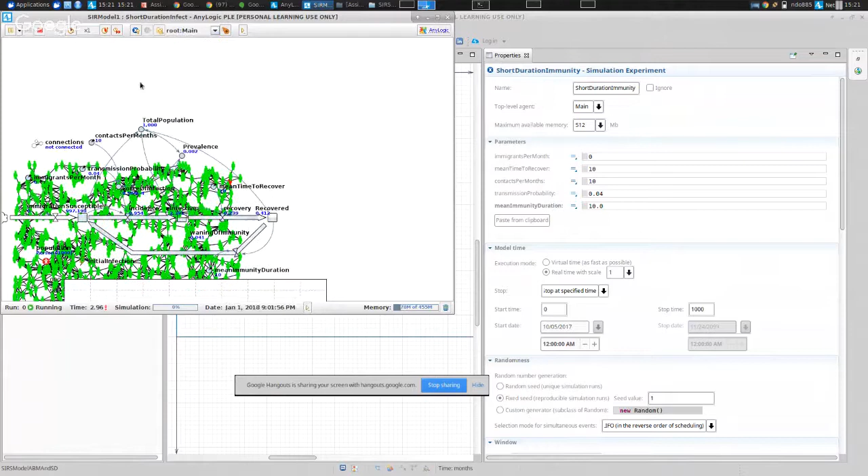So here we go. We are going to run this at full tilt, the infection spreads, etc.

You may remember that what happened here was that in the system dynamics model, we went into an equilibrium where the number of infectives and the number of recovered individuals were both equal proportions. The number of susceptible individuals was this green one here. Infectives and recovereds were both at this value here. And for the ABMs, we exhibited a prevalence which was alternating here in the general area of the number of infectives from the system dynamics, but it oscillated and was a bit lower.

Why was it oscillating like this? Can anyone say? Why would this be oscillating around? Where is there uncertainty in this model over time? Where is there some element of chance over time?

Yes, stochastics - there's uncertainty. The connections between people, although those are static, mediate a sort of transmission over the connections, which picks a random person to connect to whom I'm already connected. So if I'm infective, I send a message to a random connected person around me.

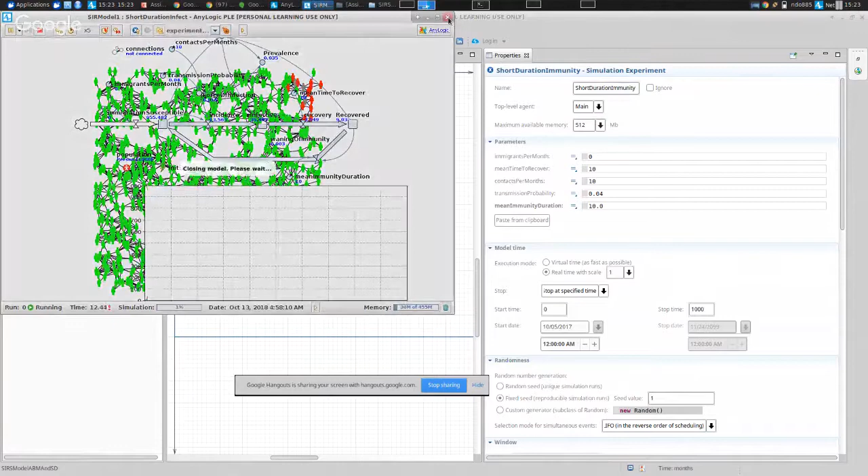I had imposed last time, by fiat, a distance-based network where two given individuals, A and B, are connected if and only if A and B lie within 20.675 units of distance of each other. I noted that each of these small squares, the tiny squares, was 10 units of that. And I noted that in AnyLogic there's a corresponding thing that translates that to meters, which we abstracted away from. So here we're going to have people connected to some number of others.

I'd like to put in first machinery to allow us to see how many people they are connected to. Secondly, machinery that varies that a little bit to see another variant involving their connections. And then, moving on from that, I'd like to examine the impact of choosing different network schemes.

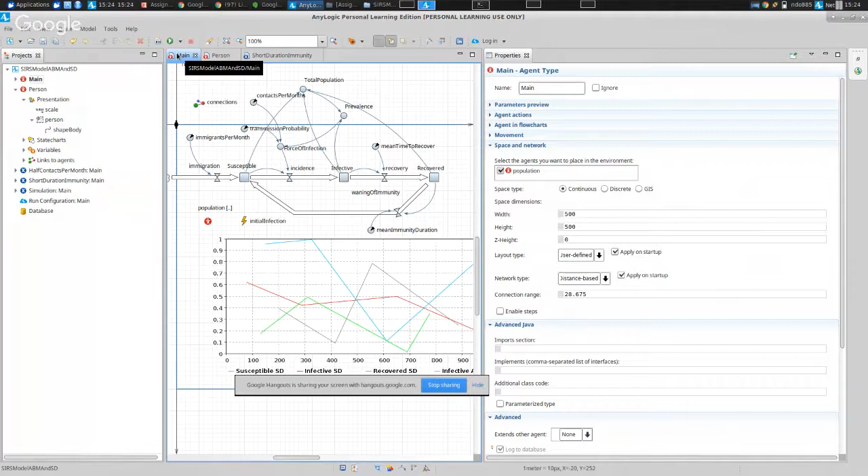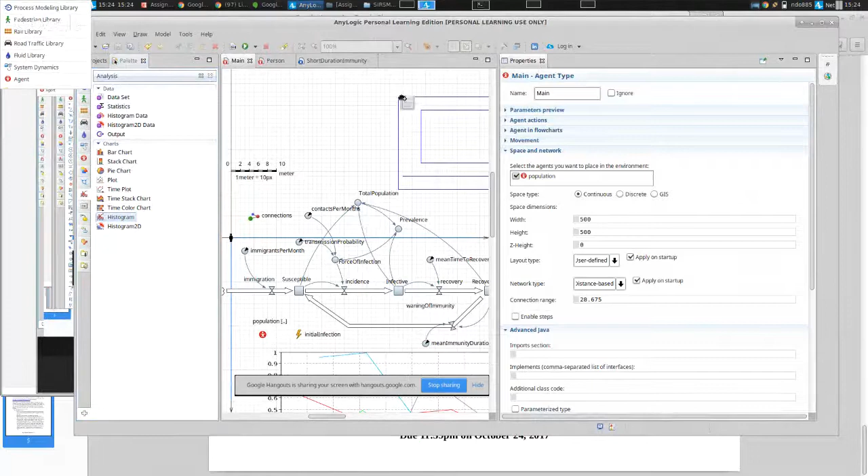Okay, we have miles to go and little time, so I'm going to ask you to follow me carefully. The first thing I'd like you to do is open your palette, go to the Analysis tab, and drag in a histogram. A histogram is shown here.

What does a histogram show? Can anyone tell me? What's a histogram? So the x-axis will be a value, often bins of value, so ranges of values. This bin will represent things between 0 and 2, there's the one between 2 and 4, the next one 4 and 6, say. And then the y-axis is a fraction or count of all the things, how many fell into each bin. So you could think of it as an approximation to a distribution - what fraction of the time does it fall in this bin, 0 to 2?

What fraction of the time does it fall into the range 2 to 4, or the range 4 to 6? A histogram allows you to summarize a distribution in a discrete form. It depicts what fraction of the time values fall in this range, or that range. If we picked 1,000 times, we might see a bell-shaped curve on a histogram. Does that make sense? Have you seen that before?

Hearing no objections, I'm going to go on. This is a histogram. We're going to call this connection count histogram.

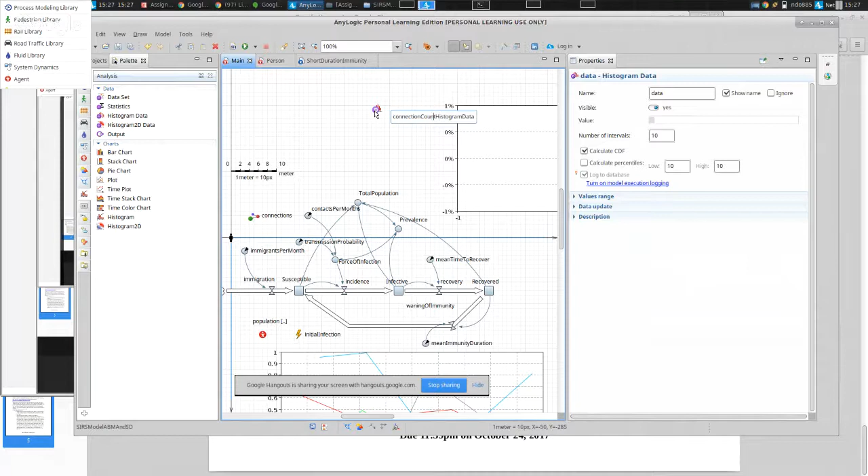But I'm going to do something a little bit more. I'm going to say index connection count, meaning it's going to be for a given person. We're going to create one later that's going to be for that person's friends. Okay, index connection count histogram data.

And then this histogram itself, we just dragged it in, and we could set the number of intervals and so on. We're going to go back to this histogram and say add histogram data, and we're going to say index connection count, meaning the connection count for the person of interest. Later, we're going to have it for their friends. So this is going to be a connection count, and we're going to refer to index connection count histogram data.

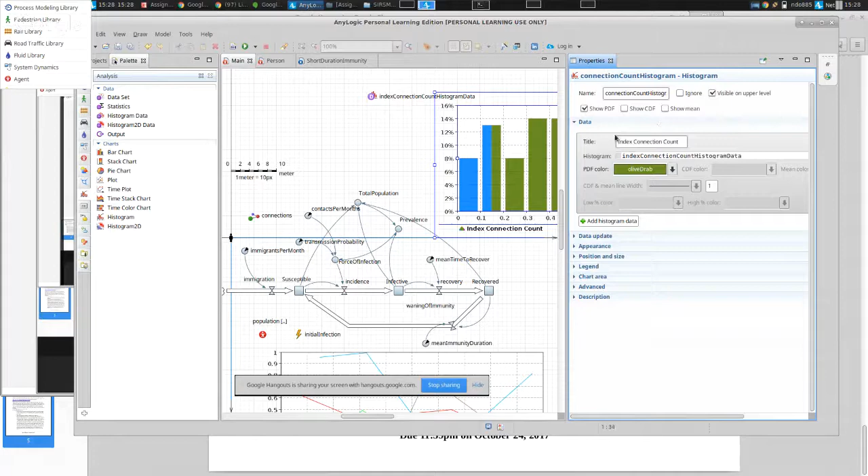That thing we just added in, that's going to be the data that we're getting. Okay? And then in the data update area, you can leave it as do not update data automatically. Are we okay with that?

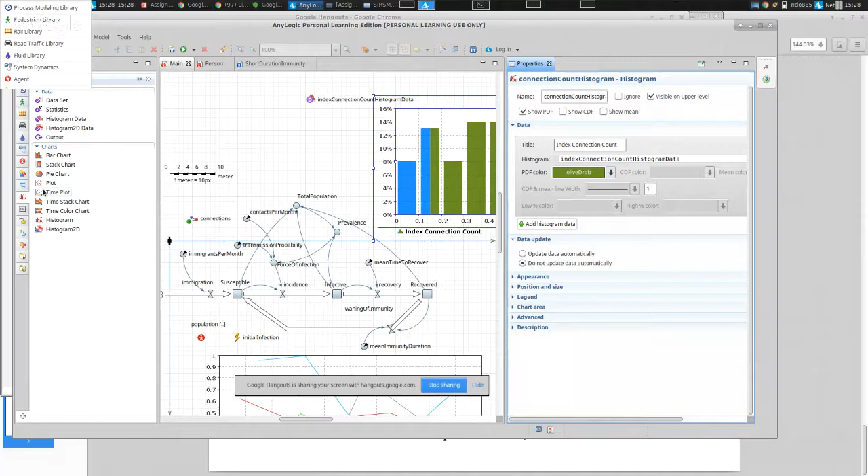What did I do? Ladies and gentlemen, I went to the Analysis tab of the palette. From the Analysis palette, I took in a histogram. I then took in a histogram data. I called each of them respectively connection count histogram for the histogram, and index connection count histogram data for the data item. And I made the histogram refer to that histogram data object.

We're going to later add another one in here too, but this is going to be the first one we're associated with. And I made sure it's do not update. Are we ready? Any questions on what I've done? Hearing no questions, I'm going to proceed.

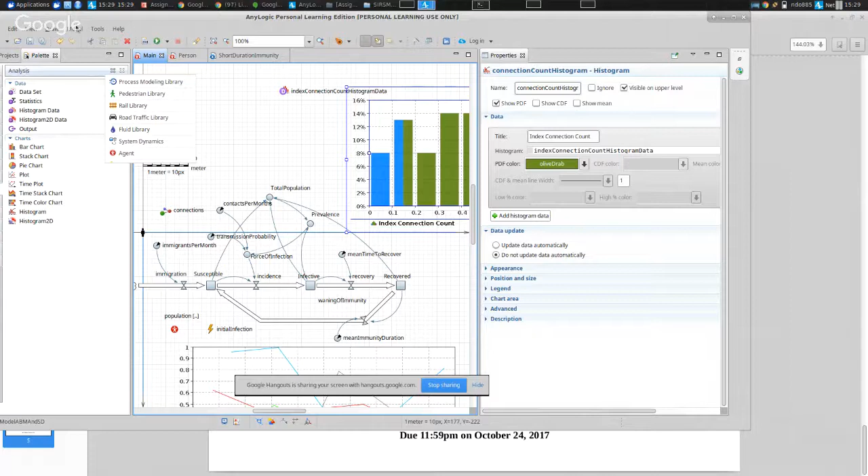I'm going to go to the agent palette, and I'm going to drag in an event. This is going to be called populate histograms. In other words, we're going to populate histograms. We're going to use this to perform actions.

Ladies and gentlemen, AnyLogic observes what's called, like other inversion of control systems, the Hollywood principle: don't call us, we'll call you. We specify a lot of objects in here that, per the inversion of control principle—one representation of which is called dependency injection—AnyLogic takes care of calling. It's a framework, and we put in things, and it takes care of calling them, invoking them at the right times. Here we call in an

event, and it's going to take care of calling it at time 0 months, occurs once here, and we're going to perform an action. This is the action which we're going to perform. Now, ladies and gentlemen, the full horror of this class will begin, okay? So I'm going to expose you to one of my other great delights in life, which consists of functional programming.

Okay, so we're going to say this dot population—welcome to Java 8—this dot population, so I'm going to request the population dot for each. So for each person in the population called person, I'm going to take that person, create a function that accepts that person, and add to this histogram data object that person's

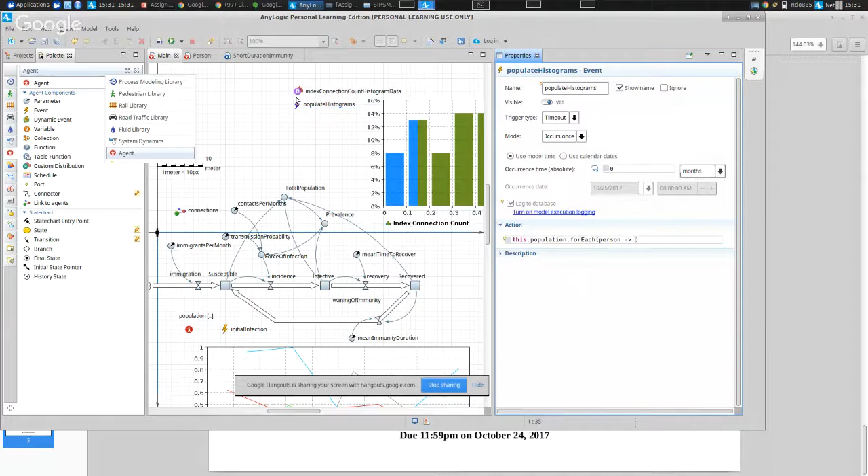number of connections. So how do I do that? I will put this up on the big screen in just a second. So I'm going to do this dot index connection histogram data dot add. Don't worry, I'll go add it up there. Person dot get connections number. That returns the number of their connections. So I'm doing this for each.

So let me go put this up on the big screen so you can see it in the full glory that it deserves. Okay, here we go. Get it here, and let's see if we can make this a little bit bigger.

Okay, let me read it out to you.

This is population.forEach - so for each person in the population, do this action. What is this thing I've highlighted in blue? That is a function, more technically, it's a closure. It takes in a person as an object, as an argument. In other words, it's a function that takes in a person, and with that person, it gets their connections, the count of their connections, and adds it to this histogram data object.

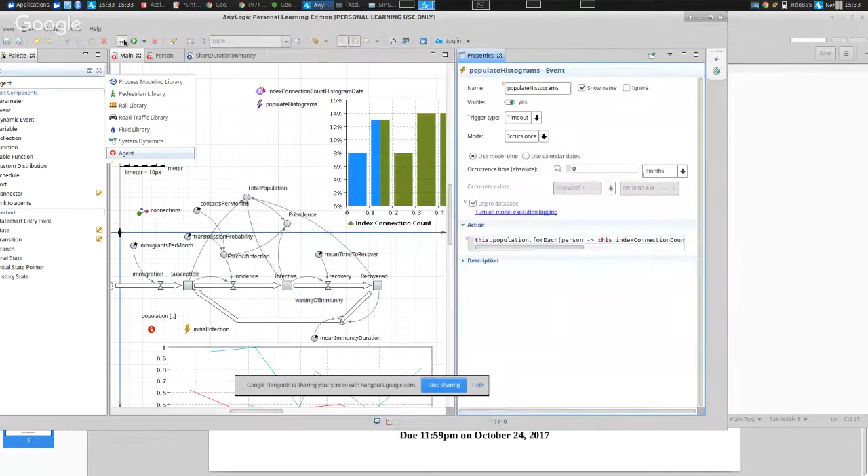Okay, ladies and gentlemen, this is Java 8. It has closures, functions, and other things that delight the mind and heart. And then some things that don't.

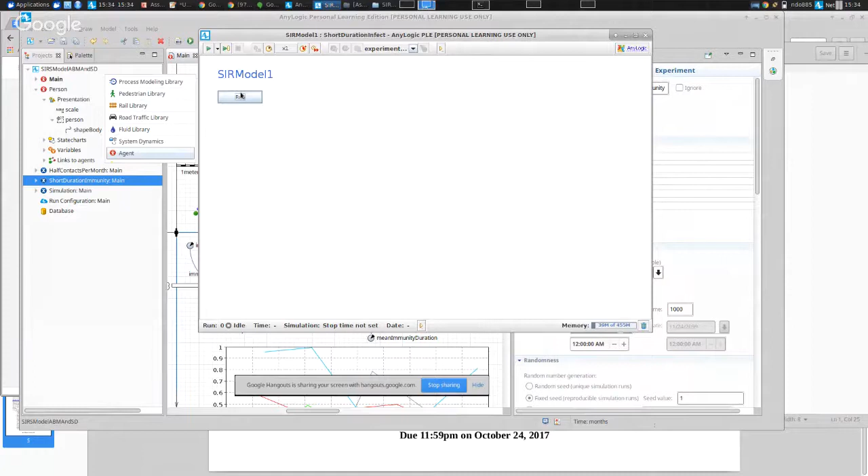Okay, so ladies and gentlemen, I'd like to run this model. What do we expect to see? We have a distance-based network here. Two people, A and B, are connected if and only if they lie within 28.675 or so units of each other. What do we expect to see in terms of the histogram of the number of connections?

Well, this is what we see, ladies and gentlemen. So what is this histogram telling us? Give me a factoid that this tells me. I've explained again what histograms tell me. Tell me, what's something useful I know about from this histogram? Something that strikes you from this histogram.

Yeah, most people have about 10 friends. People have different numbers of friends. Some individuals here have very few, like 0 to 2. Some individuals have upwards of 20 to 22.

Now, if we click on this object up here, we'll see further statistics, such as the fact that the mean is - the gentleman in the back hit it bang on - the mean is 10, almost to the decimal point. That's not an accident. That was chosen by someone standing in front of you.

And we also can get some breakdowns here. There's a standard deviation of 3.37, a sample standard deviation. The minimum is 1, the max is 20. So we have quite a range. For example, this person way out here has 1 connection, right? No one has 0, apparently, but some are densely packed.

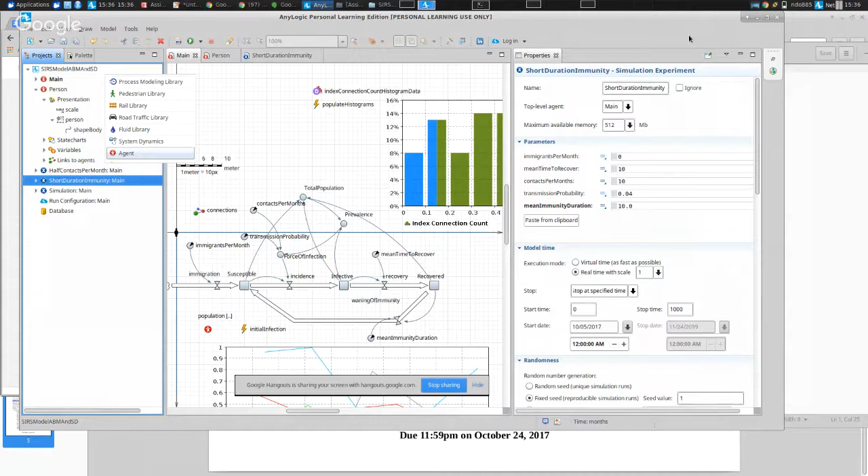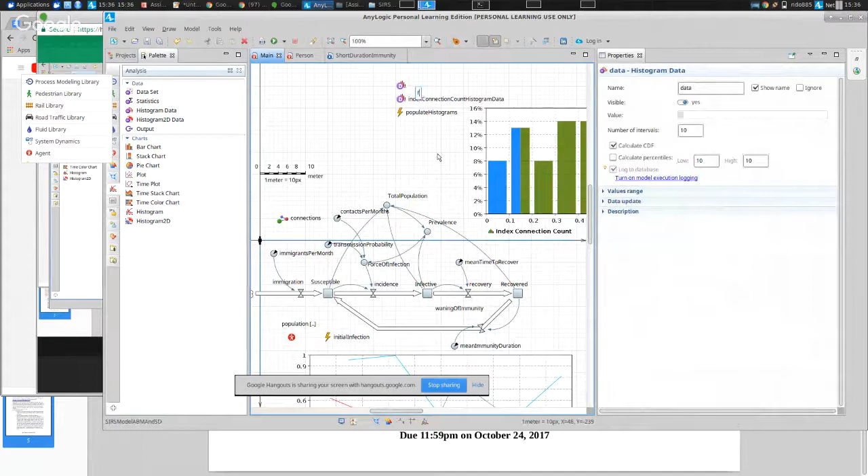I'd like to do something a little bit more, ladies and gentlemen. I'd like to go and add in a new histogram data object here. Okay, here we go. We're going to add in a histogram data object, and this one's going to be called friends connection histogram data. Note that I'm adding in not a histogram, but histogram data. A histogram is the chart. Histogram data provides the data for the chart. It bins it and so on.

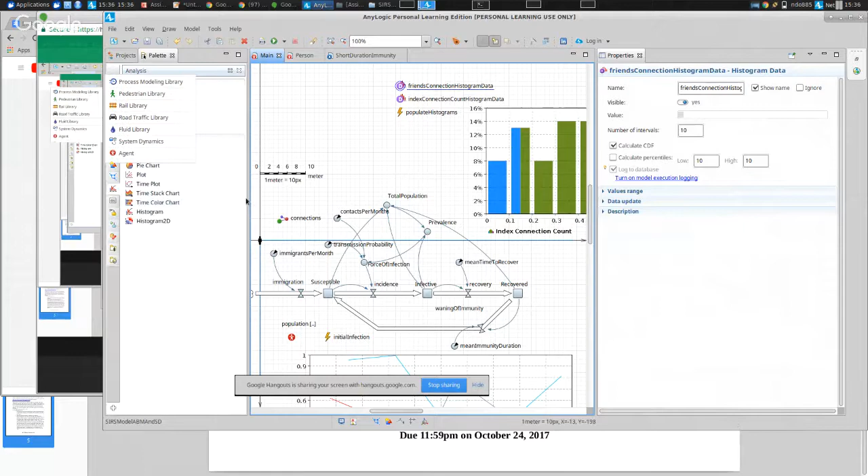So I just dragged in from the palette, the analysis palette, a histogram data object called friends connection histogram data.

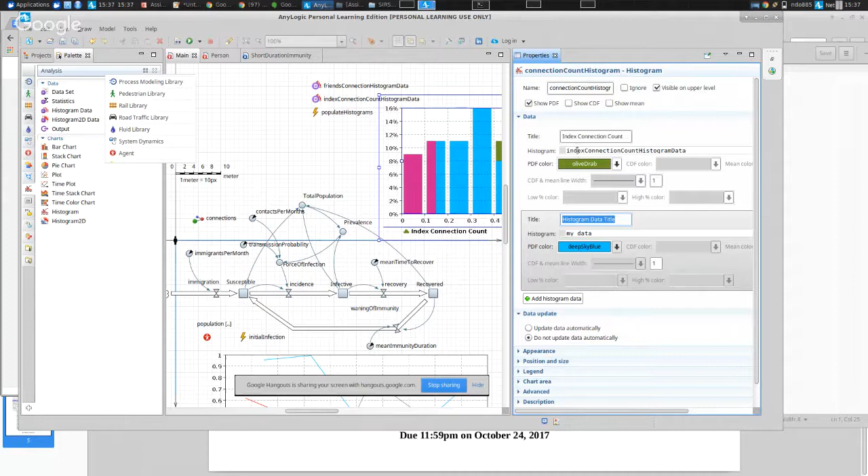And I am going to go to the histogram, and add a histogram data object to refer to those friends. Instead of calling it index connection count, as I did above, I'm going to call it friends connection count. And instead of being olive drab, I'll let it be deep sky blue. This will be based on friends connection count histogram data. We could put this.friends connection count to emphasize that if we wanted to.

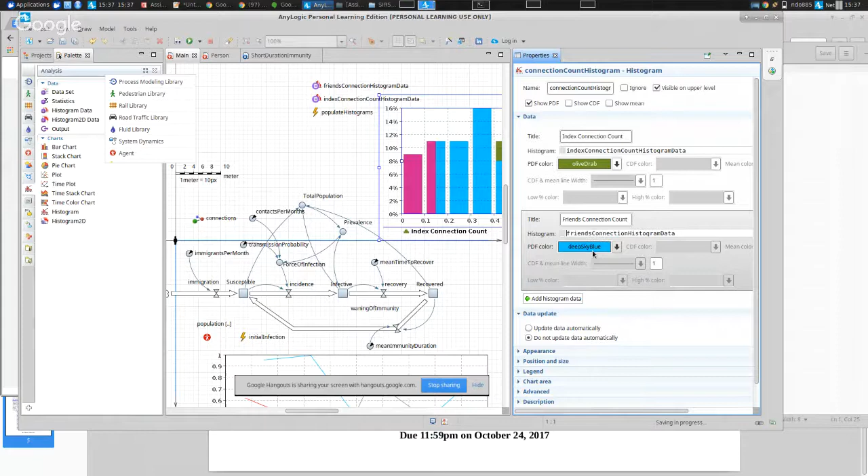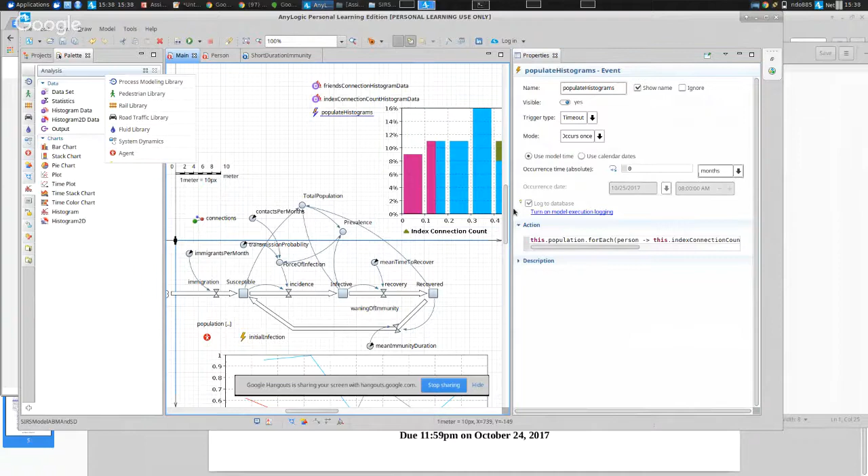So now this histogram is going to include 2 histograms: one for each person in the population, and one for the friends of people. Next, let's go to populate histogram. And here, ladies and gentlemen, we are going to do this in a more traditional way - we're going to do for person in the population.

We're going to have an inner loop. For person, for friend in persons, we're going to have to handle a special case. So maybe we'll do that up front. We actually know everyone has a friend here, but let's just deal with it up front.

If person.getConnections number is greater than 0, so if they have connections, then we will go through each of their connections. So we're going to go through each person in the population. As long as they have friends, we'll get the connections of that person, and then for each of those friends, we will add them into the friend connection count thing.

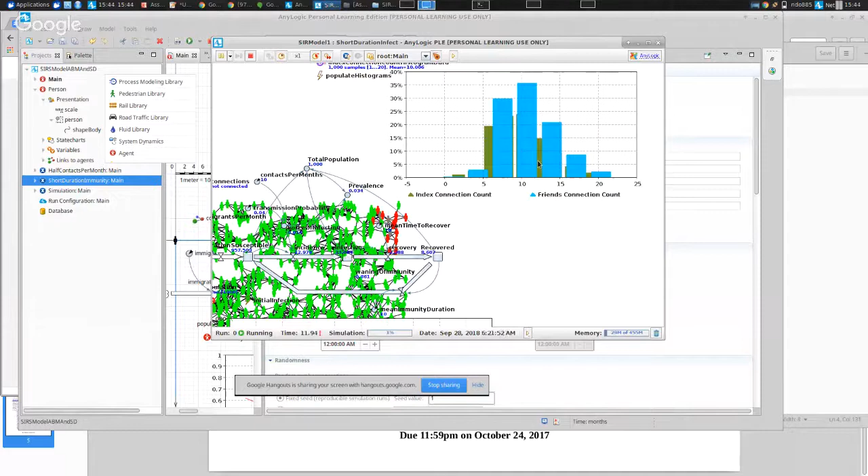Ladies and gentlemen, the fox has shown its tail. Okay, so here we go. Which of them is larger? Well, we don't have to speculate. Let's go look at each of these. Here it even says the mean for each person in the population is 10. The mean for the friends is what? A little bit higher, 11, ladies and gentlemen.

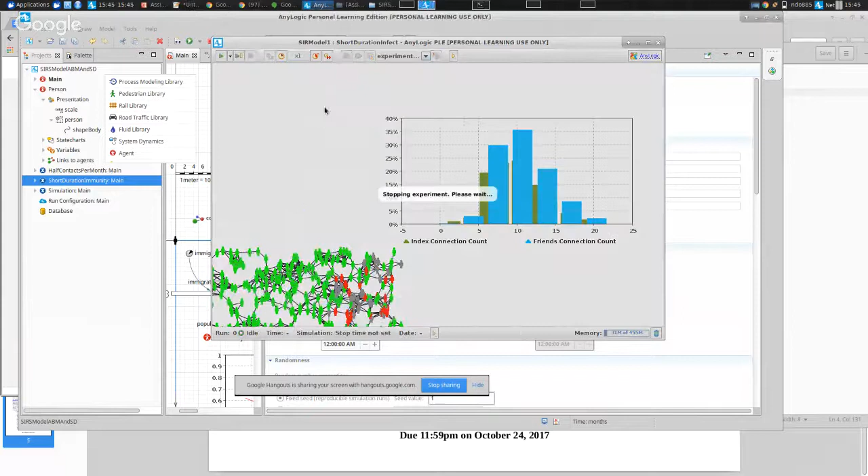Okay, we see the friends have the same range, but they're skewed towards the higher end for reasons that Eric articulated. The friends tend to overrepresent people—if you have many, many connections, lots of people are going to name you as a friend. You're going to be added into that histogram many times. Therefore it'll skew towards large numbers of samples from things that have large numbers of connections, because they're named as friends by many, many people. And hence we have this seeming paradox: if we consider people in the population and ask how many connections do they have on average versus how many connections their friends have on average, the friends on average always have more connections than the people in the population.

So that's a point of note. But let's get on to a little bit more business, ladies and gentlemen. This was sort of a warm-up, and we'll be continuing on it next time.

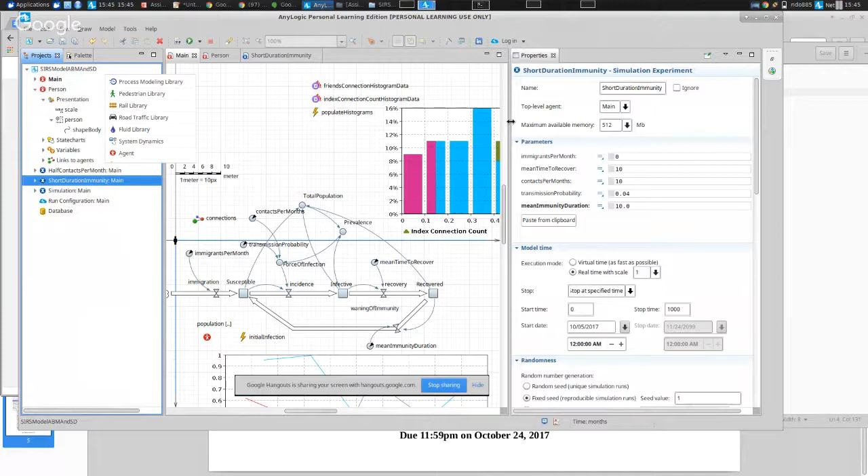Now that we know there's 10 connections on average for each person in the population, and now we know what that histogram looks like, I'd like to change the types of networks shown. So go to main, and in the space and network area, change from a distance-based network to other types of networks.

To do this, I am going to change it from the current layout type to something called a ring-based network. It's going to show them in a big ring for other types besides distance. So we're going to change it to layout type ring, and I'd like it to be a ring lattice network where the number of connections per agent is 10.

Where did I get that 10? Whence did 10 come? Why 10? Yeah, it was the count of connections we had per agent. I chose that distance, 28.675 or whatever, to give us a certain number per agent on average of connections. And now I've just used that number of connections here as the number I want to have.

So a ring lattice will arrange people in a ring. How do you think, if we place them on a ring, everyone's connected with 5 people to the left, 5 people to the right, how will that affect the spread of transmission of infection? Will it speed it up? Will it slow it down? So everyone's holding hands in a large circle, except you have 5 hands on your left and 5 hands on your right. Somehow you're holding all of them. Imagine that. You're like an octopus or something. A decapus.

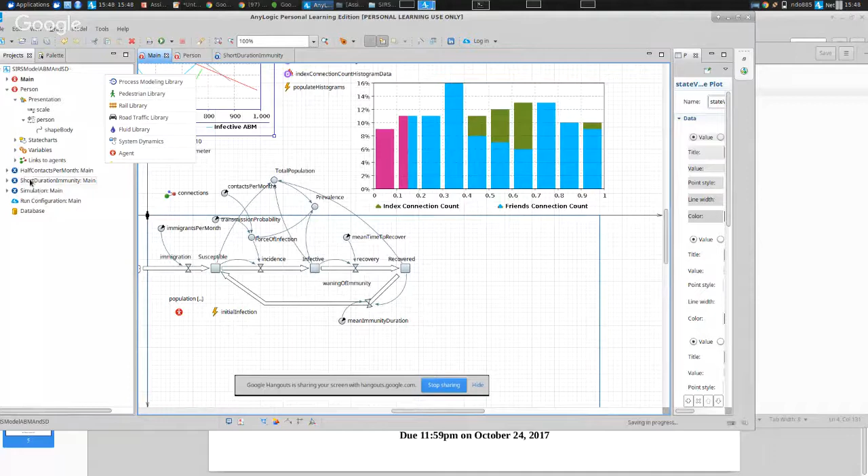It's actually spreading from behind this inartfully placed graph. So I'm going to move the graph up as I am wont to, above this area, so it doesn't occlude the real action. Ladies and gentlemen, does this speed up or slow down the spread?

The spread of infection, rather, across the network. Does it speed it up or slow it down? You should be able to answer that simple question. Anyone? Oh, come on. Give me an answer. Did it speed it up? Anyone out there? I'm not purely speaking to the internet.

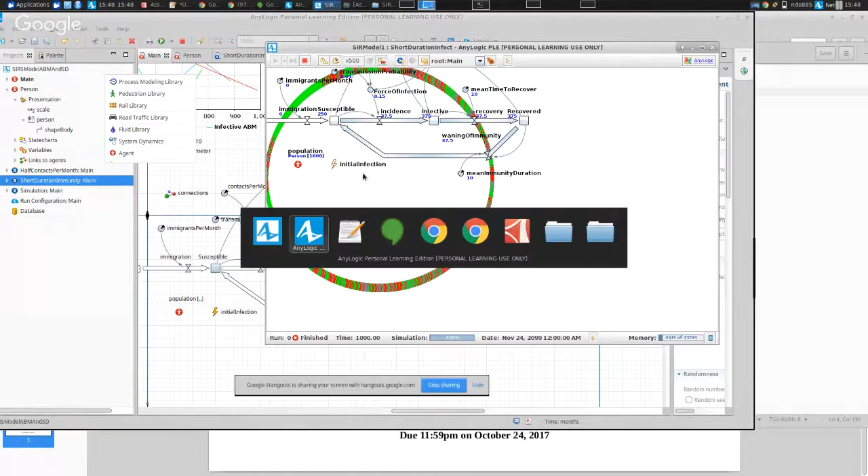Ladies and gentlemen, does it look like it sped it up? Take a look at this graph now. Does this spread slower than before or faster? Slower. It took all this time to kind of creep up to this level. Before it went up pretty quickly and went over.

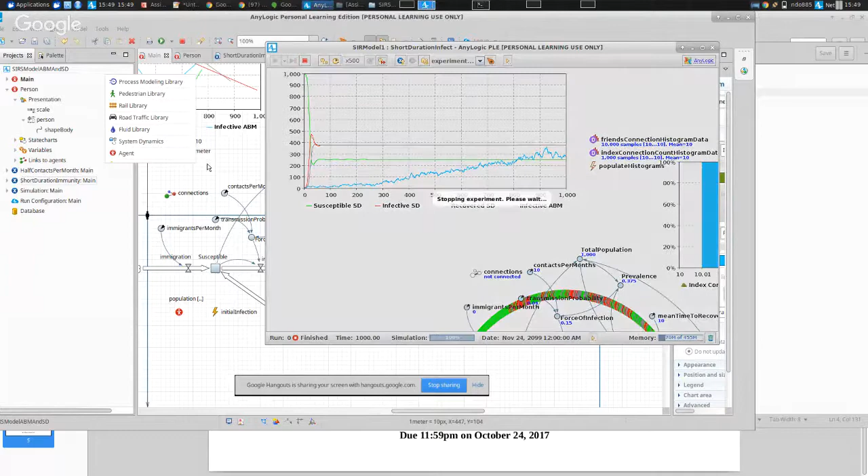Okay, next, ladies and gentlemen, I would like you to go to main, go down main, and we're going to switch it to a different sort. We're going to switch it from a ring lattice, where we're connected to only people connected on either side of us locally, the closest people on either side of us. I'm going to change it to a random network. Now we're connected with people who are, any two people, A and B in the population, are connected with equal probability.

The last one, we're connected only with people close to us. Same thing with the distance space, we're only connected with people close to us. This one, it doesn't matter who the two people A and B are, they'll be connected with a certain probability.

Do you think that would lead to a fast or slow spread of infection across the network? Fast or slow? Yeah, fast spread. Why fast? Well, there's all these people connected with others. Think about the infection as a spark, right? It can spread not just to the areas next to itself, it can waft in the wind and land on the other side of the network, land in all these different areas. You can have these sort of express paths across the network, which lead it to spread very quickly.

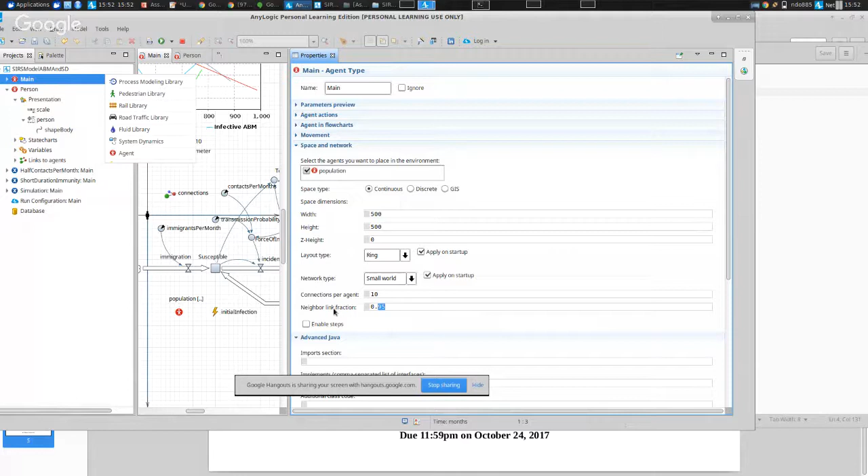But then 5%, the other fraction of the connections, are people much further away across the network, randomly connected. So now we have a combination of purely local ring lattice, 95% of the time, with global reaching across the entire network just 5% of the connections, ladies and gentlemen. But observe the dynamics.

You get something that's kind of a mixture. It looks like it's got some elements of the random network, but it rises slower because it's still got a lot of locality. It hasn't risen quite as quickly as the purely random network, but it does lead still to a closer approximation. Just those 5% of connections make all the difference.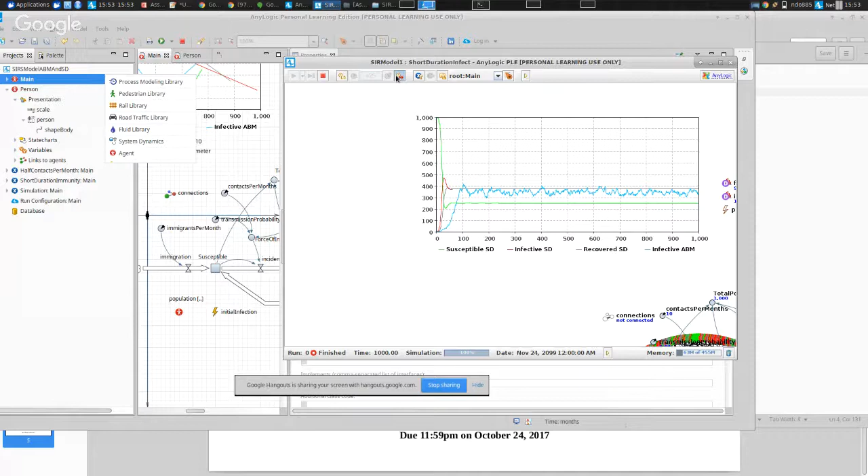And finally, ladies and gentlemen, in the final thing we're going to do in this class, we're going to change this from a small world network to a scale-free network, okay? Now, a scale-free network is going to be associated with a few hubs that have lots and lots of connections. Most people are going to have few connections, but a few hubs are going to have lots and lots of connections. I'd like for you, in this final comment, to run it with a scale-free network.

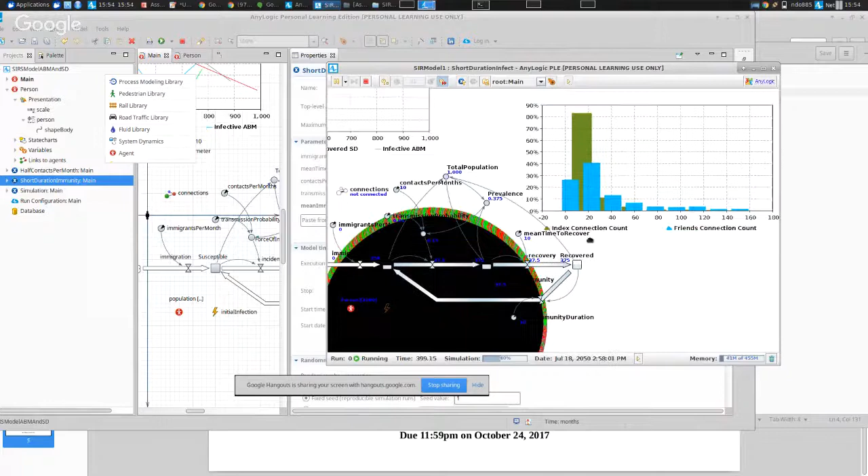You'll notice there are too many connections to show effectively. We're not able to really see what those are. But you'll notice the characteristics here: most people have a small number of connections, but some people have a large number.

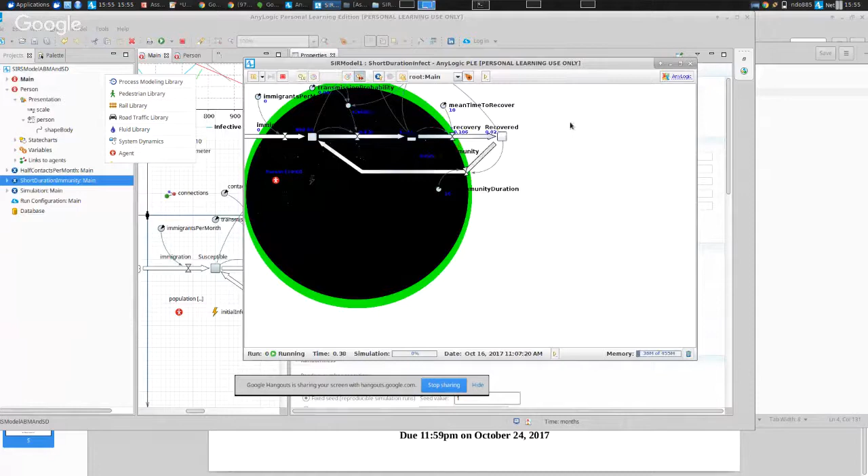We actually need to, I made a mistake, change that to be 5. The so-called M associated with this should be 5 here, in Main. That's the parameter for the scale-free network, and approximately double it is the average number of connections. So if we change it to 5, it'll mean an average number of connections per person of about 10. That will preserve the basic features. So we have about 9.95 on average.

But you'll notice the distributions. Compared to that original distance-based network, what does this histogram look like? Is it wider or more compact? Is the region of support tighter or larger? Is there more variation in connections or less than the original one?

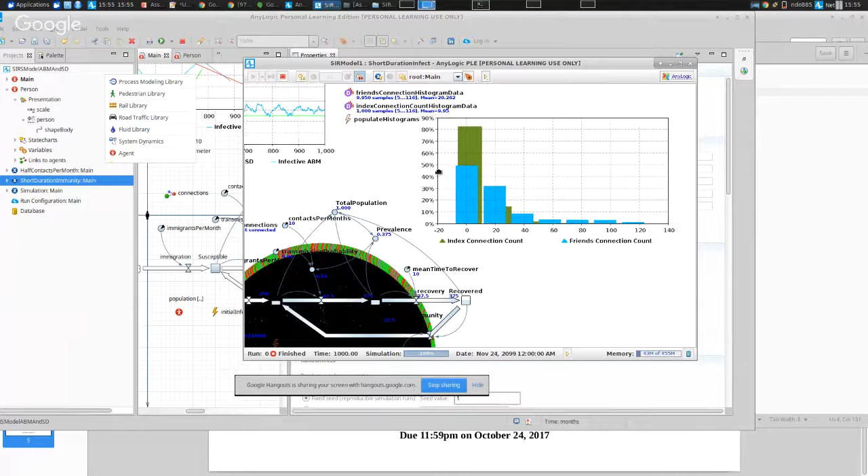Much more, ladies. The original is between 1 and 20. This is between about 0 and 120. So it simulates a situation where some people have a very large number of connections. And look what it leads to: a very rapid spread and then a persistence of infection at notable levels. As initially the infection maybe starts in the periphery with a person with not many connections, but then it hits big time—like it hits the gasoline and explodes—and can spread to lots and lots of other individuals. So it actually rises very quickly.

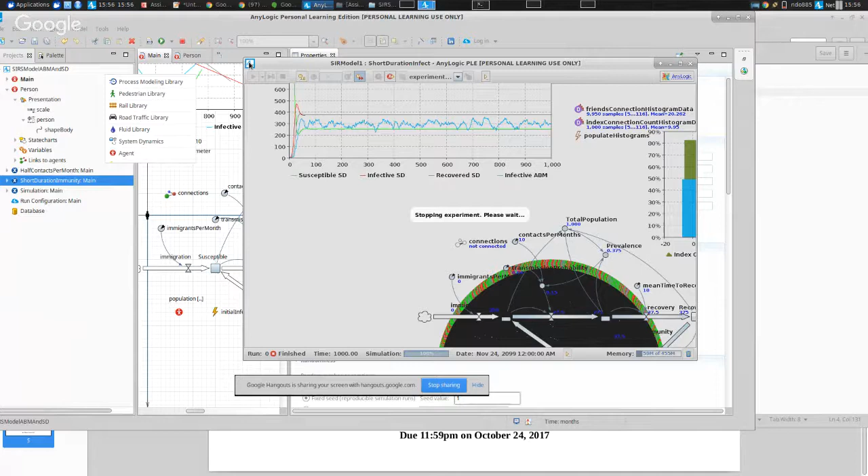I'm going to ask you, before next time, I'll be posting a take-home exercise. It'll ask you to look a little more closely at the histograms for each of these, so we can talk about them next time. I'm also asking you to do a derivation of the fixed points of the system dynamics model, and we'll see how the agent-based model compares in its prevalences.